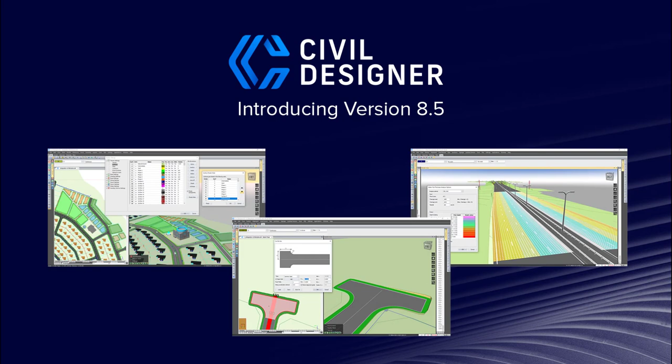Thanks, Charles, and welcome everyone to today's webinar. We're very excited to show you all the new features in Civil Designer 8.5. As Charles mentioned in his intro, I'll be looking at Civil Designer 8.5's compatibility and interoperability when it comes to sharing your project design data with other organizations that you need to collaborate with on a project.

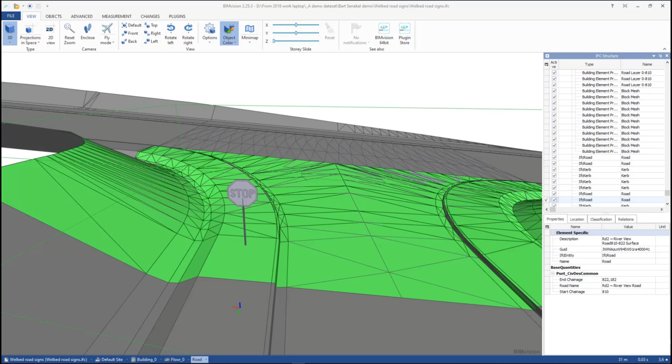Civil Designer has always been fully compatible with a range of industry standards when it comes to the sharing of data, including file formats such as DWG, DXF, DGN, and LandXML. But the current buzzword when it comes to sharing information is BIM. For today's webinar, we're going to be mainly focusing on how we share the Civil Designer design elements in a BIM environment by making use of the industry foundation classes file format, which has the IFC file extension. The IFC file is the ISO registered standardized file format for sharing information on BIM platforms.

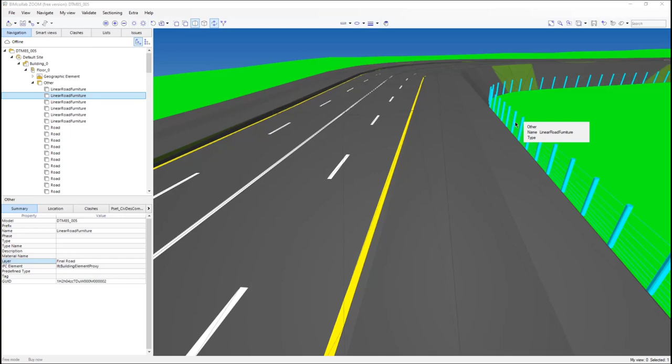Something very important I must mention is that as from Civil Designer 8.5, the IFC export module is included in Civil Designer's base module, the Design Center module. So anyone with access to a Civil Designer 8.5 license will have the full IFC export functionality at their disposal. The reason for this is that we have replaced the previously used IFC engine library, which had costs and licensing restrictions attached to it, with the ODA, or Open Design Alliance's, IFC library. We have been members of the ODA for years, and they are a non-profit organization that provides software development tools to developers, which now includes the IFC tools.

This new IFC library has allowed us to add additional intelligence to the IFC output, with, for example, extruded profiles replacing generic meshes, which reduces the exported IFC file sizes substantially.

Today's webinar is to show you some of the new features added to the IFC export functionality in Civil Designer 8.5. With Civil Designer 8.5, we will now be exporting our Civil Designer entities with much more built-in intelligence, with objects such as IFC flow segments for our pipes, and IFC sign and IFC kerb for our road entities. We can now export road signs, road markings, and linear road furniture like guardrails, which are in your project, to BIM models with the IFC export function. We also now have support for IFC 4x3, which is the latest version on the market.

So I'm going to run through the IFC export process and then show you what those files look like in some of the readily available BIM viewers on the market.

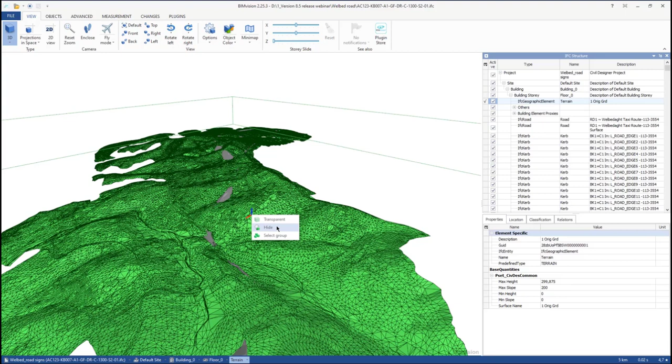And selecting my terrain surface. I can view some of the properties over here. I can select to hide the surface and then just zoom into the road section over here that I'm interested in. You can see the intersection that I had in view in my Civil Designer project. You can select specific entities and then view the exported properties in the properties bar. I can select, for example, the stop road sign and then view the properties that have been allocated to it from Civil Designer. So that's the road signs.

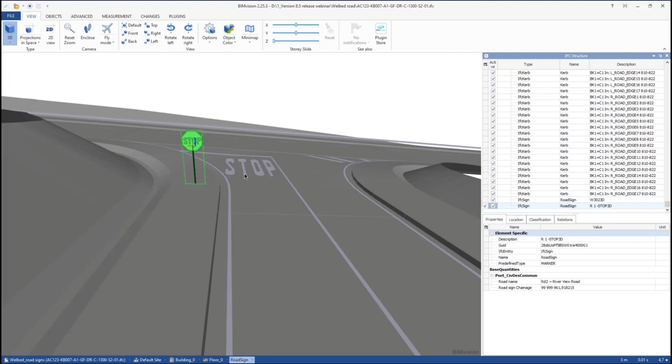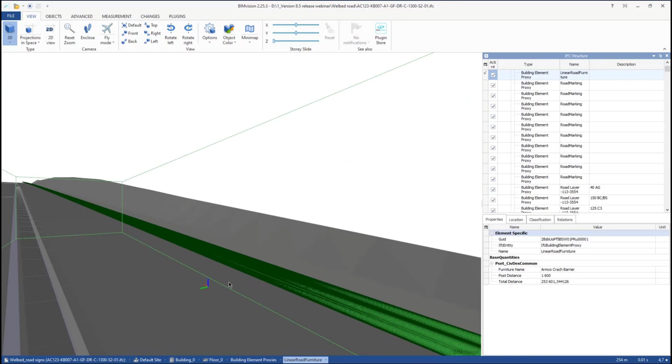You've got your road markings that you can select and view as well, and the linear road furniture across the road. Let's just have a look at that. So that's my guardrail in the BIM viewer. It's a little bit trickier to pan around than in Civil Designer inside these other programs, but it gives you an idea of exactly what you're getting in the BIM model.

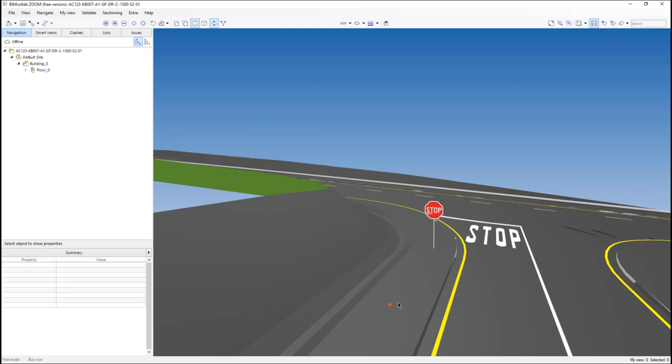So all this information we're exporting from Civil Designer to the BIM models. And then just having a look at the same project in BIMcollab Zoom, which is also a free BIM viewer, which in this case is giving me a little more color, but pretty much the same thing. So you can view your BIM IFC files and check out the properties in the summary section.

Okay, so moving back to Civil Designer, I'm going to run through the settings in the IFC export dialog in a little bit more detail, with the focus being on the added new features in Civil Designer 8.5.

As we are on the topic of compatibility and interoperability, one of the popular existing export options is the export to shapefile. We have always been very good and very efficient at exporting to GIS shapefiles. The shapefile export creates a very comprehensive file which includes all your project's design data, which can then be imported into a GIS software package. You can also export to KML if you want to view your design in Google Earth. Perhaps you want to check the position of your site in Google Earth or show it to a client. And then the export to IFC is the export that we are focusing on today.

The IFC file is the preferred file type for exporting data to BIM models. The first thing to do would be to select the Civil Designer design items that you would like to export with this particular IFC export. You can select to export your terrain model and then which of your road files you would like to export. If you have a sewer, stormwater, or water network in your design, then you can optionally export these as well. And then all your auxiliary services, so normal crossing services, can also be exported with your IFC file.

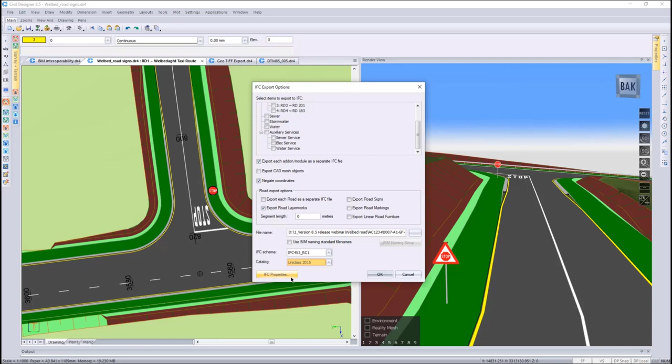Okay, then we also have the IFC Properties button, essentially assigning which properties of your Civil Designer entities you'd want exported to the BIM model. Initially, we exported a fixed set of properties for each Civil Designer entity, be it a road, sewer, stormwater, or water pipe. But then we added this custom properties option to give you, the user, more control over which properties you would like to export to the BIM model. So as you can see, this was just a fixed set of properties that we initially assigned. For example, a stormwater pipe with all the properties that you would expect to have assigned to a stormwater pipe.

So what sort of customization can be achieved? You can actually double click and edit the property name or the source. The source being the exact property that will be extracted from the Civil Designer design data in your project, and your description can also be edited and changed.

You've also got an option to disable a certain property from being exported, those being from the fixed set of properties. You do additionally also have an option over here to right click on a line and insert your own new property. If you insert a property, you can then leave it blank so that someone who then loads your IFC file into their BIM model might be able to add their own specific or required details to that entity in their specific BIM model. So those are just some of the customization options that we do have.

Okay, then I just wanted to once again point out some of the new entities that we are exporting to IFC in Civil Designer 8.5. So that would be your road signs, road furniture, road markings, as well as your crossing services, or as we call them now, auxiliary services.

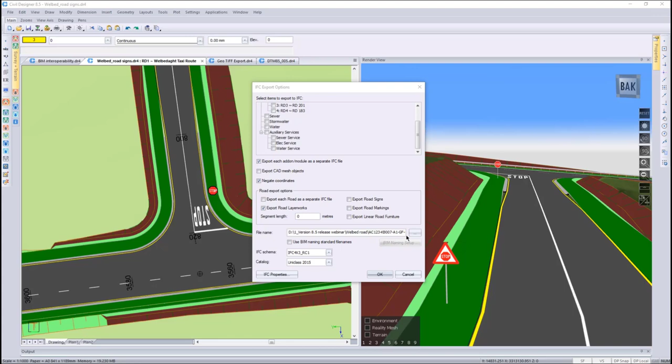Okay, and then another addition to Civil Designer 8.5 is that we can now save to an IFC zip file. So the exported IFC files for larger projects can get quite big. The file sizes get quite large, but with the IFC zip file, you are reducing the file size quite substantially. So once again, another nice feature in Civil Designer 8.5 is this option to create an IFC zip file.

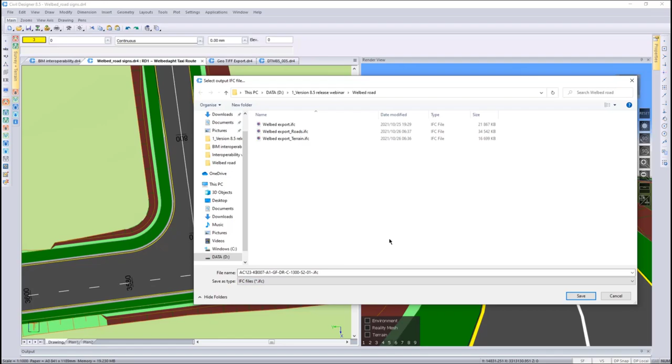When I exported this project to an IFC file earlier, I also exported an IFC zip file for the project. And here in File Explorer, you will see that the zip file size is quite substantially less than the normal exported IFC file. You can see that the standard IFC file is about 63 megs, whereas the zip file is in the region of about 11 megabytes.

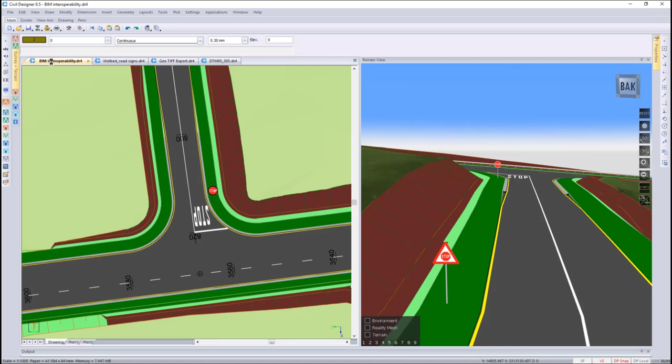Okay, so next up, I'm going to export a Civil Designer road and view that in Allplan. So just returning to Civil Designer, I'm going to go to this tutor project of mine. I'm just going to close the render view. So in this case, I'm just looking at exporting this current road in view to IFC in those segmented road segments or sections.

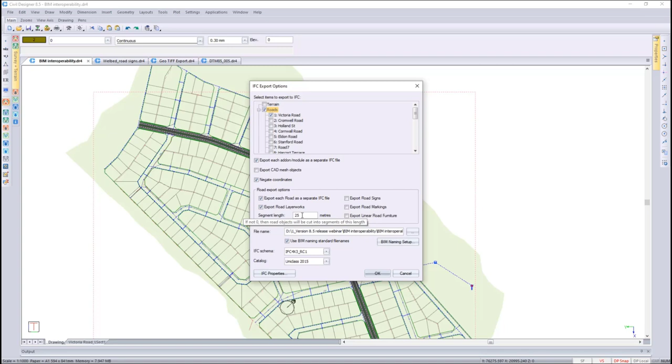Okay, so it's just this individual road that I'm going to use, and I'm only exporting Victoria Road. So I've selected to include the road layerworks and then to segment the road into 25 meter lengths. Okay, I've done that already just to save some time, so let's have a look.

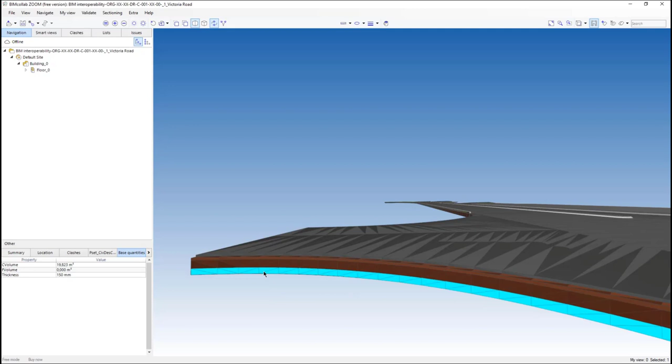We can view the exported IFC file in BIMcollab. So you can see the summary. I'm just looking at the road layers, for example. So you'd be able to check out the road quantities for each road segment and the individual road layers. And then viewing the exported Victoria Road in Allplan. Allplan is a concrete modeling, reinforcement and detailing package.

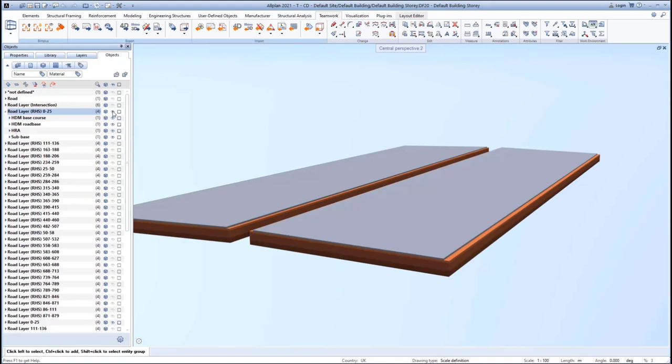So in Allplan, just switching off the visibility of all the other road segments and just viewing an individual segment of the road. Victoria Road was a dual carriageway, so we have the two carriageways side by side, and then just selecting properties of individual road segments. So that's the advantage of exporting those segmented roads. In this case, you can view and select individual road layers for each segment. You can check the attributes and, for example, check the quantities for each of the road layers.

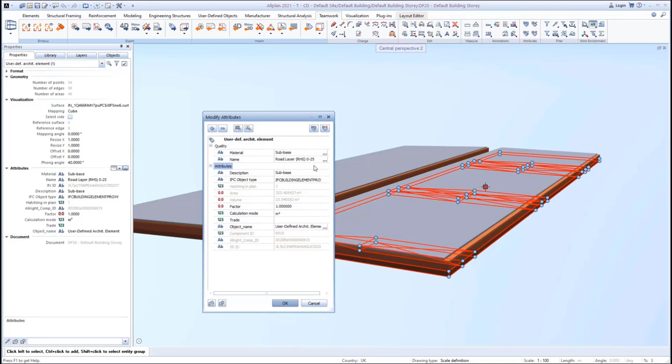So as you can see, there are lots of improvements built into our IFC export in Civil Designer 8.5, and we really are on the cutting edge of this IFC development. And that will all be available to you in Civil Designer 8.5. There are loads of other new features coming in Civil Designer 8.5, and we will try our best to cover all these new features in the upcoming webinars.